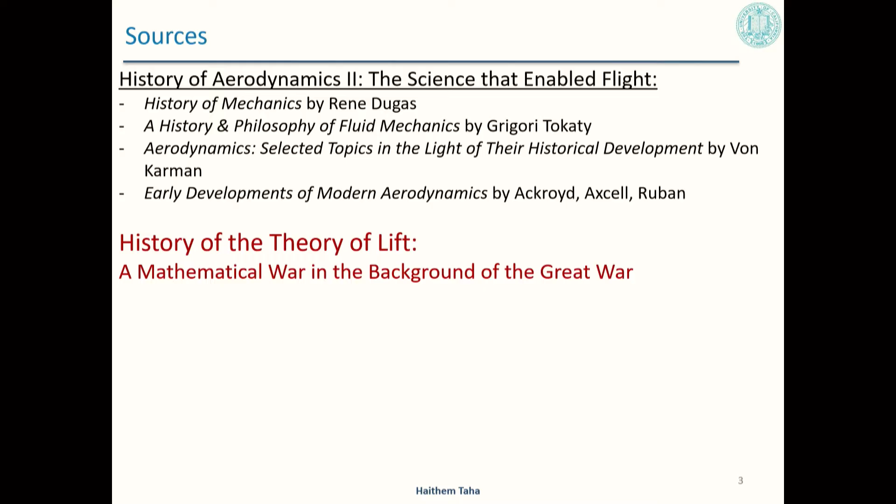So in this lecture in particular, I will mainly focus on the narrative by David Bloor in his masterpiece, The Enigma of the Aerofoil. It's the most encyclopedic book on the subject.

In fact, we aeronautical engineers are very lucky that David Bloor has decided to write on this subject, which is near and dear to the heart of every aeronautical engineer. It's a 550 pages book that tells a very rich story on the history of the subject from the eyes of a sociologist who relates the evolution of the theory to the underlying incidents in World War I politics and press.

I studied this book in detail and I summarized it in a 90 pages document, and these two lectures will provide summary of the summary. So it's far from being complete. I apologize from the beginning that many interesting and important stories will have to be neglected.

So let's start. This is the beginning. December 17, 1903, Wright brothers made the record of the first powered flight. But unfortunately, at the time, there was no guiding principles, no mathematical theory that can answer even simple questions in aeronautics, like how much lift a wing can generate, for example.

The Wright brothers had to rely on their amazing engineering skill, engineering ingenuity, and tons of wind tunnel tests, so to come up with a successful model and make history.

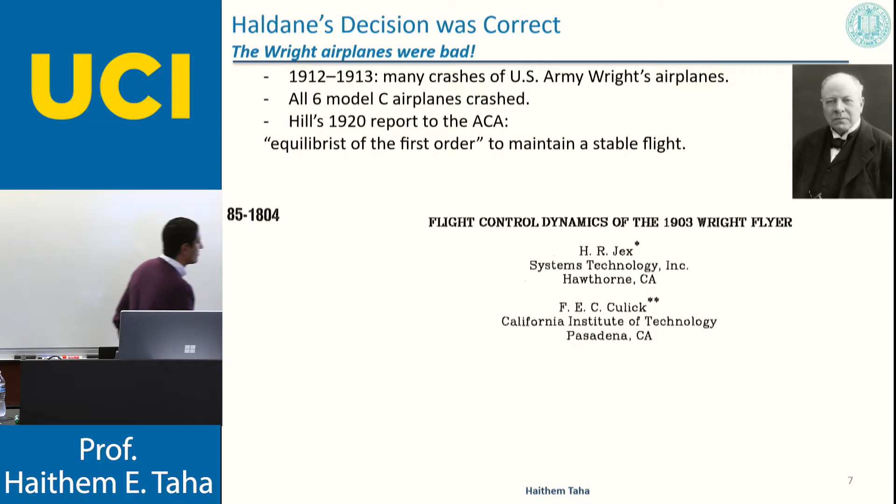Later on, when the aeronautical community learned the concept of flying qualities, the effectiveness of an airplane to perform its mission, now we can look back and assess the flying qualities of the Wright airplanes, which was already done in a 1985 paper by Jex and Culick, and they concluded that the airplane has very poor flying qualities. So Haldane's decision was not too bad, because the Wright airplanes wouldn't have been very useful to the Royal Air Force anyway.

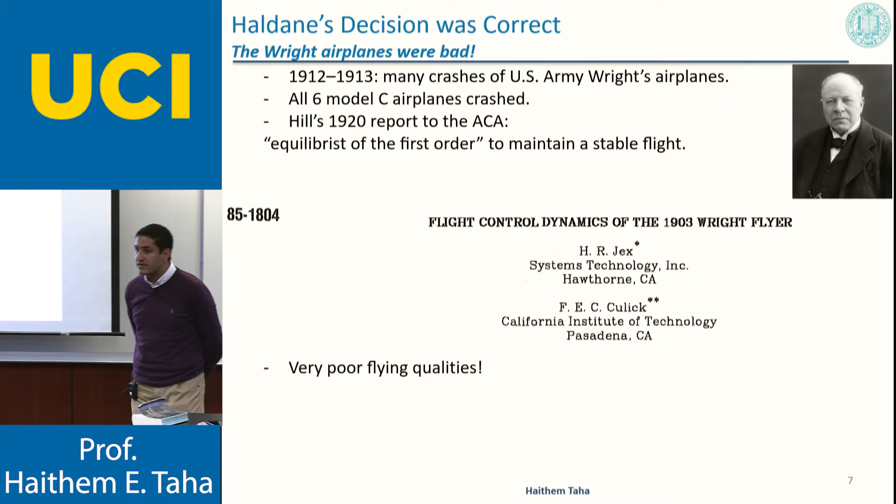All right, now let's do some digression, because the composition of the ACA, the Advisory Committee for Aeronautics, were mostly from Cambridge folks. So let's do a little bit of digression here to talk about the Cambridge Mathematics Tripos exam.

It was a very important exam for people at Cambridge, based on which many fellowships and prizes were decided. So they used to rank students. Top students were called wranglers, like senior wrangler, second wrangler, and so on. The order was published in the Times magazine. You can see this was something - the senior wrangler used to receive celebrity-like treatment.

The exam was quite competitive, as you can imagine. And actually, some professors used to include in the exams some of their research problems as exam problems. In fact, in the year 1854, one of the problems was to prove what we know now as Stokes' theorem.

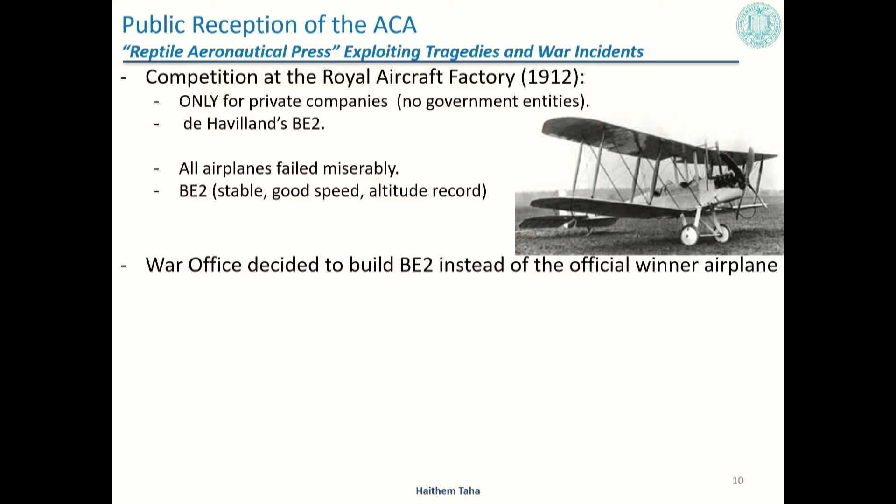Unsurprisingly, the War Office decided to build the BE-2 instead of the official winning airplane. This infuriated private firms and political opposition. And around that time, during the early days of aviation, the accident rate was high. The BE-2 had its own share. So the political opposition and the associated newspapers exploited every accident, every tragedy of the BE-2 to point to the inferior design of the BE-2 and the incompetence of government entities in general compared to the private sector. So, for example, the aeroplane came with a headline, March 19, 1914, The Victims of Science. They literally wrote that it was the scientific approach to airplane design that had killed these unfortunate men.

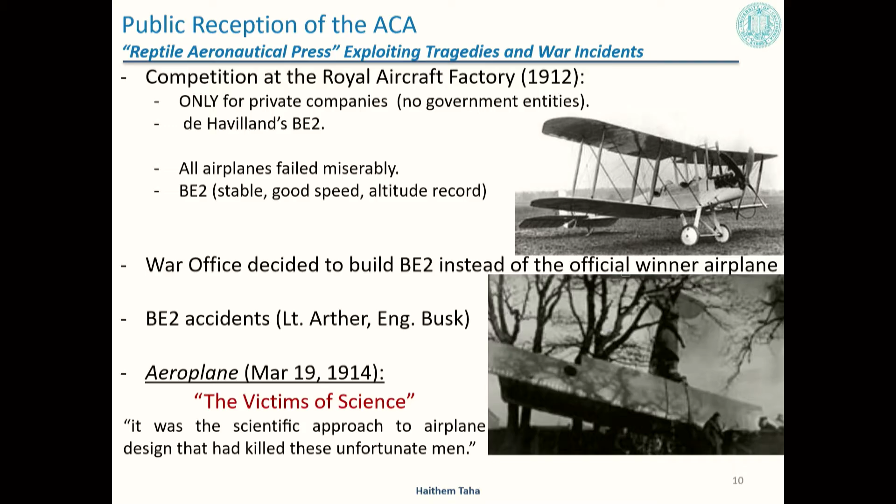So it reminds me of the recent movie, Don't Look Up.

Fits nicely. So the situation was inflamed even more in the summer of the next year - this is after the war had already started - the Fokker Scourge incident. Anthony Fokker equipped one of the German airplanes with a forward-firing machine gun synchronized to fire through the propeller. That was very nice. And the plane itself was a mono-wing, so it was more maneuverable than the BE-2 bi-wing, which was more stable but less maneuverable. This gave the Germans an advantage over the British during that summer, leading to the loss of some airplanes and people.

And this was the pretext that the opposition wanted. Pemberton Billing, he was one of the members of parliament, founder of the Supermarine Company. He was one of the supporters of the private firms in parliament. So he described the government entities as murderers inside the parliament. Due to the seriousness of these allegations, the parliament had to form two committees for investigation, one for the Royal Flying Corps and one for the Royal Aircraft Factory.

The first committee did not find violations from the Royal Flying Corps, but the second committee concluded that the rights of the private sector had been encroached upon, and they demanded governmental support for private aircraft firms. Under this extreme pressure, the government had to shut down all the design, build and fly activities at the Royal Aircraft Factory, which was a very sad decision, because before leaving, O'Gorman and his colleagues at the Royal Aircraft Factory designed and built one of the best airplanes of the time, the SE-5.

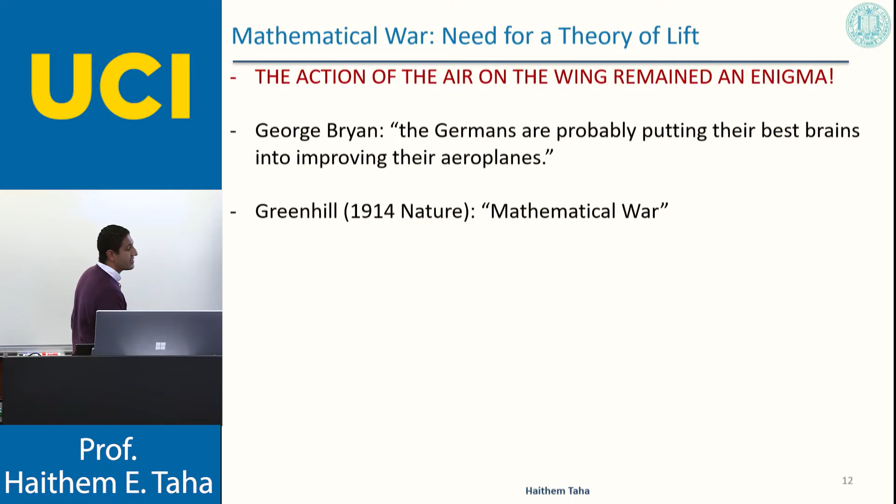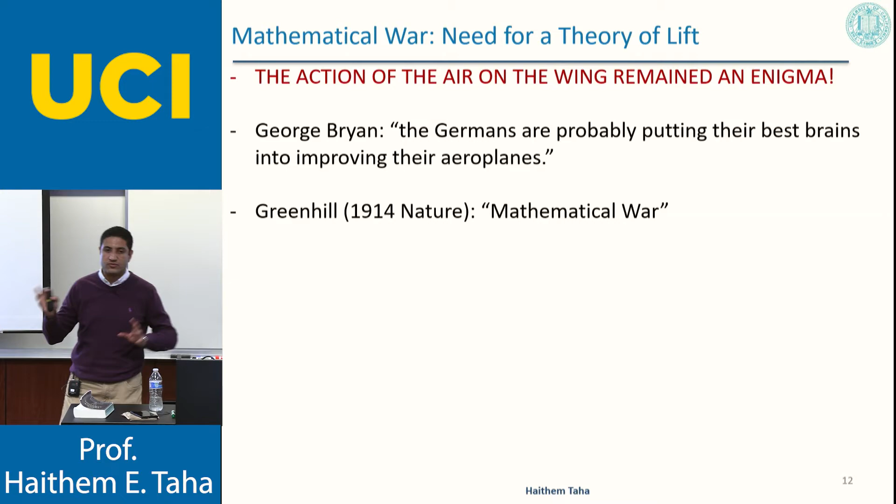With all that, the action of the air on the wing remained an enigma. In the words of George Bryan, the founder of stability theory, the Germans were probably putting their best brains into improving their aeroplanes. As Greenhill portrayed it in his 1914 Nature paper, it's a mathematical war. Basically, right before and during World War I, there was a parallel mathematical war between Germany and England to develop two theories, one for stability and one for lift.

This lecture is focused more on the lift—not more actually, wholly on the lift. And you can ask, what's going on? Why is it a big deal? This is already the 20th century, and it's a classical problem in physics. It's not relativity, it's not quantum mechanics. We know the equations of motion, force equals mass times acceleration.

What is the issue? Yes, we know the equation of motion, but in order to apply it, you need a model. Even Newton himself adopted different models for the air. In one model, he considered air particles as interacting with each other. In another, as composed of an infinite number of particles not interacting with each other. In one of his models, he considered the air composed of an infinite number of particles moving in straight lines until they strike an object. Once they do that, they lose their momentum normal to the object, resulting in a normal force. This leads to the famous sine-square law.

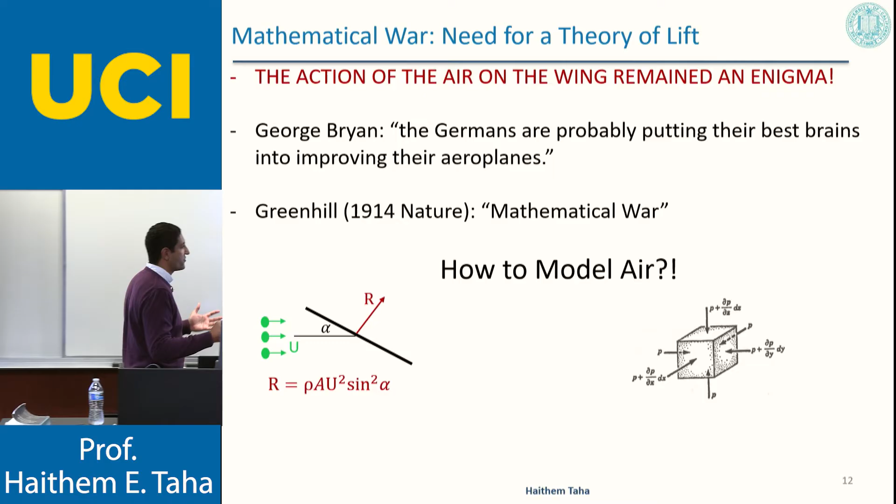Well before this time, physicists and fluid mechanicians realized that this is not the right model for air, and a better model would be through what we call the fluid element, which allowed us to use differential calculus in conjunction with the equations of motion to come up with a good model for the fluid continuum.

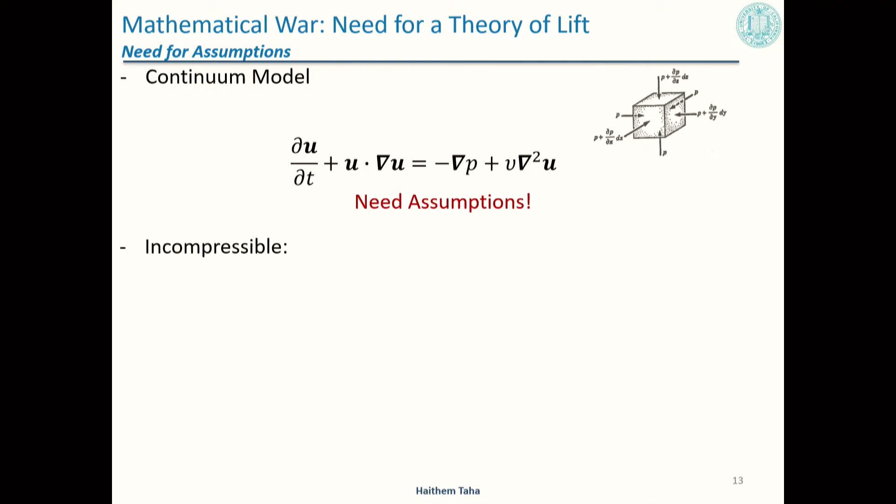Now the equations of motion are the Navier-Stokes equations. Yes, but we need assumptions—we cannot brute force solve Navier-Stokes equations at the time. So we need assumptions. The best assumptions at the time were: although really air is compressible, at the time flight was occurring at small speeds, like 70 miles an hour. In fact, up to 200 miles an hour, the error in density due to this incompressibility assumption is within 3%, which is very reasonable.

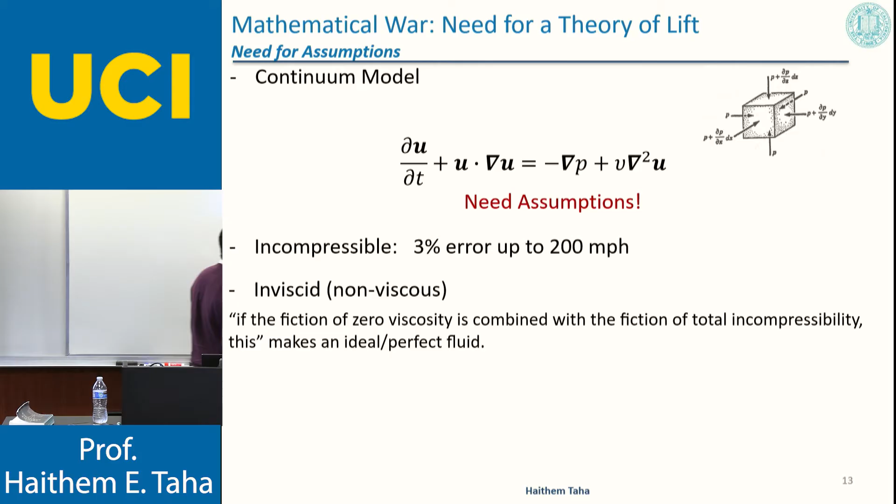Also, air has very small viscosity, and the thought at the time was a theory for zero viscosity fluid would be good enough for a fluid with small viscosity. David Bloor expressively stated it: if you add the fiction of zero viscosity combined with the fiction of total incompressibility, this makes an ideal fluid. It's a fictitious concept, all right? And if you accept these two assumptions, you get the Euler's equation for an ideal fluid.

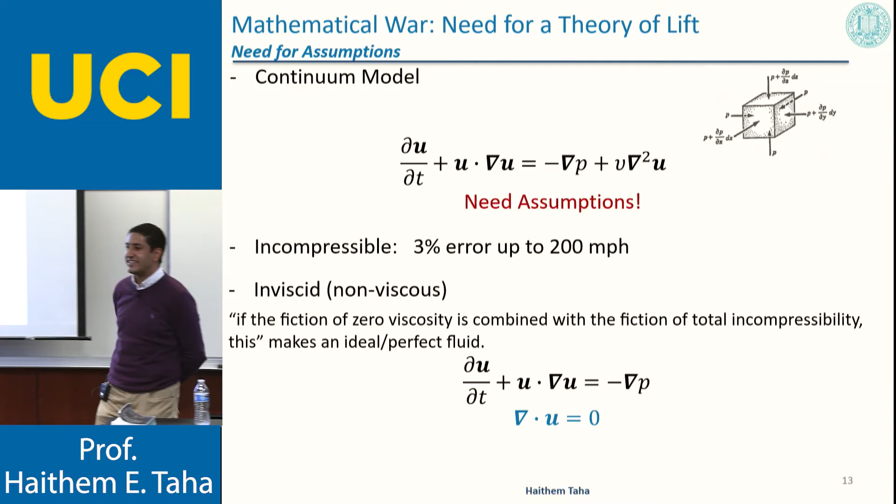And even with this whole set of assumptions, it's not enough. We cannot obtain a theoretical or analytical solution for the Euler equation even today. So we need more assumptions, and hopefully they should be brilliant in the sense that they're reasonably accurate and also enable us to do something we could not do otherwise.

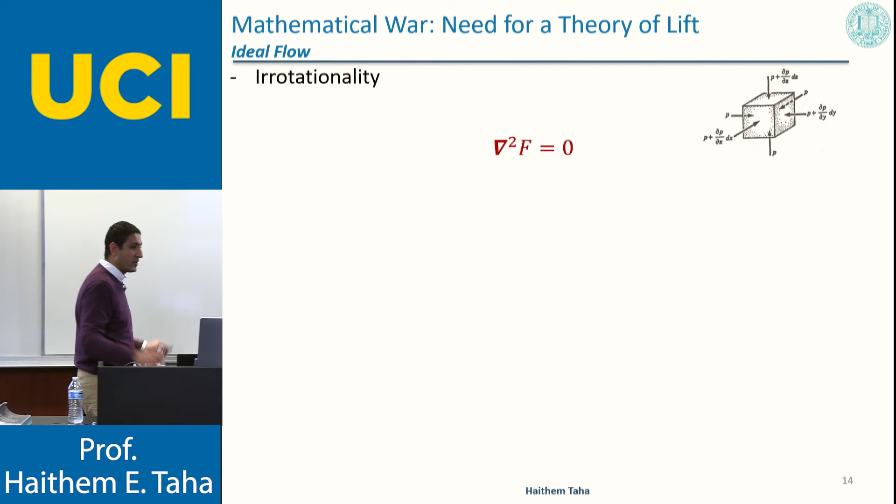That was the irrotationality assumption, which simply assumes that fluid elements, while moving, do not rotate around themselves. If you accept this assumption, then Euler's equation reduces to the Laplace equation, which is a very happy coincidence. Why? Because this set of equations appears ubiquitously in physics—in gravitation, heat, elasticity, electromagnetism, electricity, you name it. So we have a huge legacy to exploit.

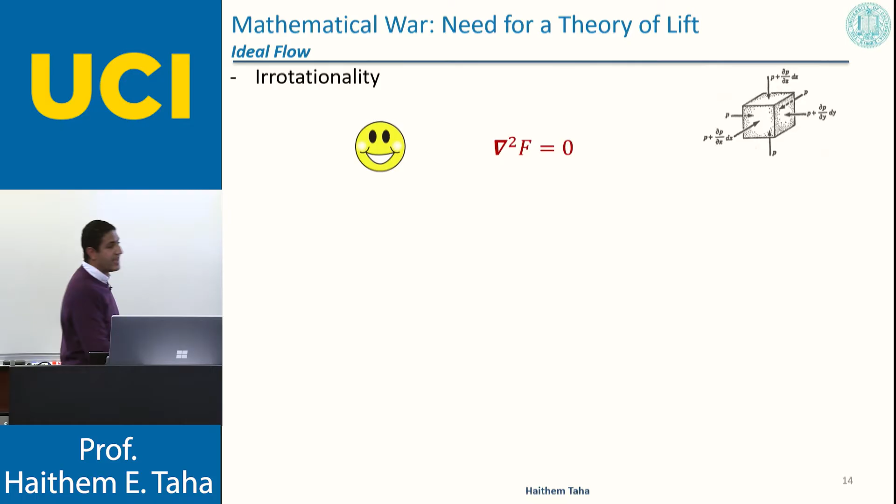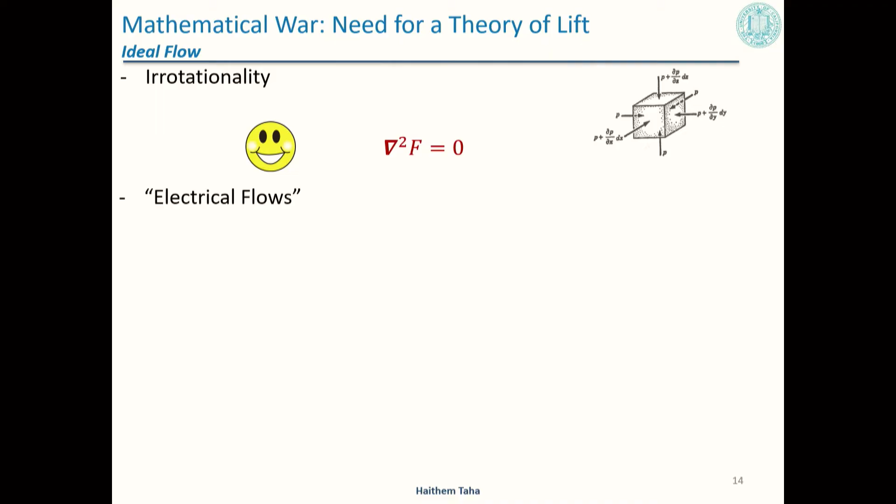In fact, Maxwell himself exploited the analogy between hydrodynamics and electricity to solve the flow through an orifice. This is why these potential flows are sometimes called electrical flows. So now we know how to solve this equation—we have a huge legacy from all other branches. Let me give you one way of solving these equations, which is quite interesting. A function f that satisfies this equation is a differentiable function. A differentiable function in the complex domain, we call holomorphic.

A function f that satisfies this equation represents a flow field over some body. This means that any holomorphic, differentiable function represents the flow over some body. Give me any differentiable function, it immediately represents some flow field, which means we can construct flow fields in the blink of an eye.

So let's try together. What is the simplest differentiable function of non-zero derivative? Well, it's f of z equals z. This represents a free stream. Not so exciting. What about another suggestion?

Well, what about 1 over z? This represents a doublet, which is the hydrodynamical analog of an electrical dipole. Again, another fictitious thing. What about the addition of the two? Well, it represents the flow over a circle, which is a very realistic thing. So now we're talking, right?

Now we're very happy, because now we have the flow field in the entire domain: velocity at every point, pressure at every point. In particular, over the surface, we can integrate and get the force.

And here is another happy coincidence. There is the Riemann mapping theorem, which implies that give me any nice shape in the domain, I can always convert it into a circle. So now I can solve the flow field over any shape. I will convert it into a circle where I already know the flow field.

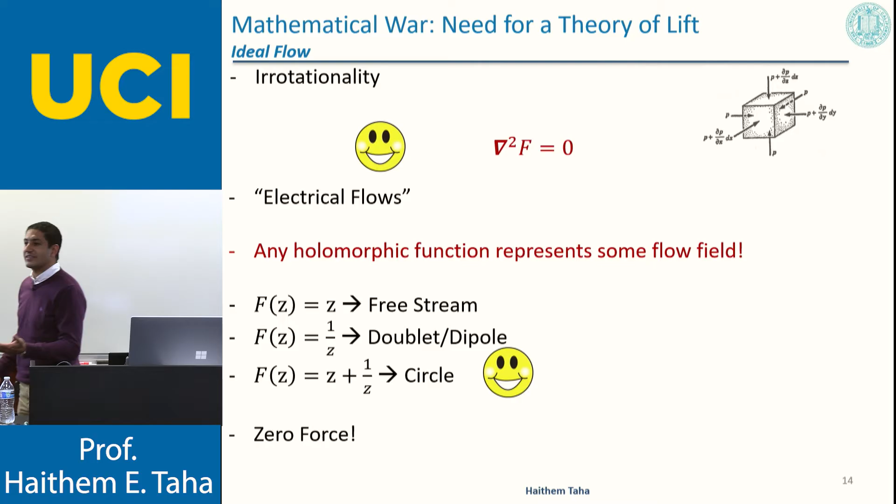We're done. And if you do that and get the force on the circle, you get a zero force. Not only on the circle, on all shapes, which is quite disappointing. So when we thought that we got it all, we got nothing. That is the D'Alembert paradox, which in Germany was called the Dirichlet paradox.

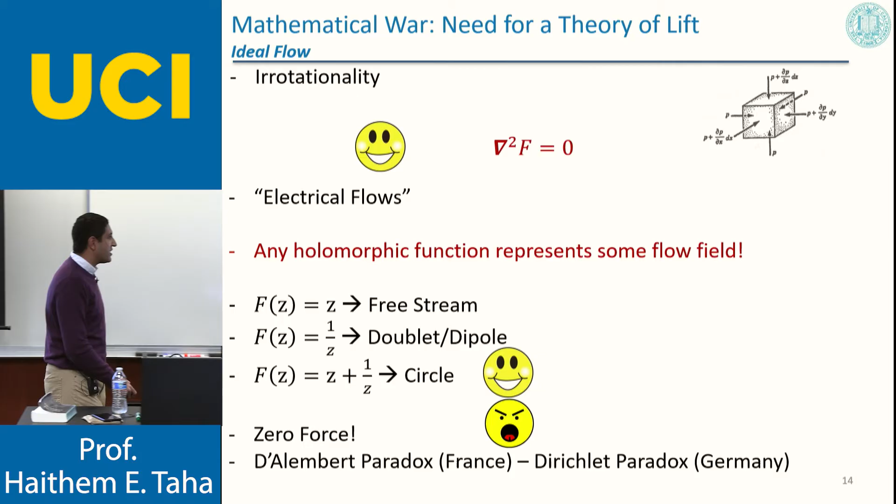So we need to relax one of these assumptions, and luckily Helmholtz and Kirchhoff realized that we can have more solutions. The zero force solution is not the only solution. So for the Laplace equation, we just need to relax the irrotationality assumption in a smart way, and we will get lift and drag and everything, from the Laplace equation.

So the issue is, here is the point: if you give me a way to relax the irrotationality assumption, this will represent a theory of lift. At the time, there were two competing theories of lift, one in England and one in Germany. Interestingly, the one in England appeared first in Germany and vice versa.

The British theory was the discontinuity theory of lift, which appeared first in Germany by Helmholtz and Kirchhoff. Helmholtz considered this extreme example: a flat plate meeting the air at a right angle. You cannot give me zero force for this. Ironically, if you solve the flow field in the classical way, you will get a zero force for this—it's agnostic to the shape and the angle of attack.

It doesn't matter. So he relaxed the pure irrotationality assumption as follows: he allowed sheets of discontinuity to emanate from the sharp trailing edge, sharp edges, both edges. And he modeled the air behind the plate as dead air, stagnant. This already breaks the symmetry between the flow in front of the plate and behind the plate, so it will cause force, for sure. All right, so that's Helmholtz.

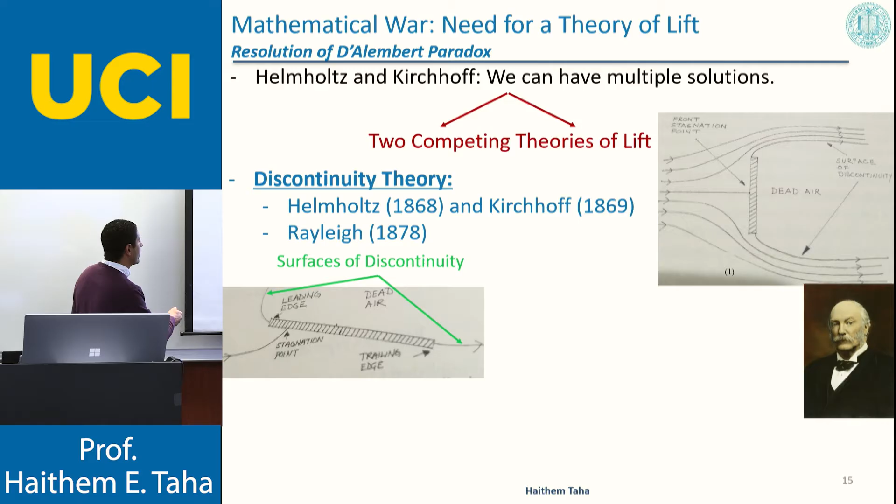Then later on, Rayleigh used the same line of thought, the same theory in England now, to solve the flow over a flat plate at a smaller angle of attack, more representative of flight. He used the same theory in the sense of sheets of discontinuity emanating from the sharp edges, dead air on top of the plate. This will cause a normal force on the plate, and here is a nice expression for the normal force, from which you can compose lift and drag.

Let's look at the lift coefficient variation with the angle of attack. This is interesting. The red curve here is the Newtonian theory, sine square law. Blue is Rayleigh's theory. Black is the classical theory that we currently teach everywhere in our aeronautical engineering schools, which is close enough to reality.

As you can see, both the Newtonian theory and Rayleigh's theory underestimate lift significantly. So nature is much more generous than what Rayleigh and Newton had thought about lift. In fact, some people even blame Newton for the delay of aviation, because if this formula by Newton were to be correct, aviation wouldn't be possible.

Some people blame Newton because the very small lift and large drag associated with his model might have discouraged some people from pursuing aviation.

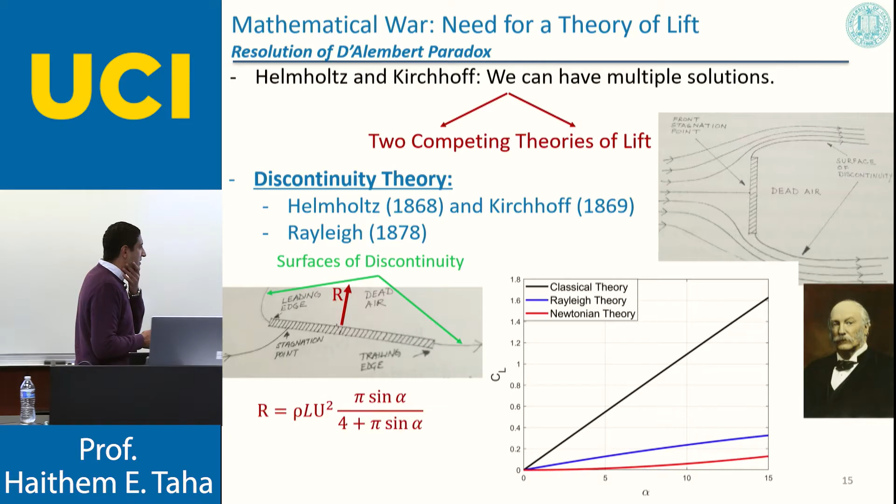But anyway, at the beginning, at the ACA, the Advisory Committee for Aeronautics, the main business was the discontinuity theory of lift by their president, Rayleigh. It was extended theoretically, verified or validated experimentally, tested experimentally, and so on.

As early as 1909, an experiment by Mallock compared the theory to experiments, and he found a great difference, as we already pointed out. Not only that, he found that the main lift in reality comes from the suction side, on the upper side of the airfoil, not from the pressure side. This is in contrast to what the theory was suggesting.

The theory was suggesting something like the air is pushing the flat plate or the wing like this. This is not how lift works, right?

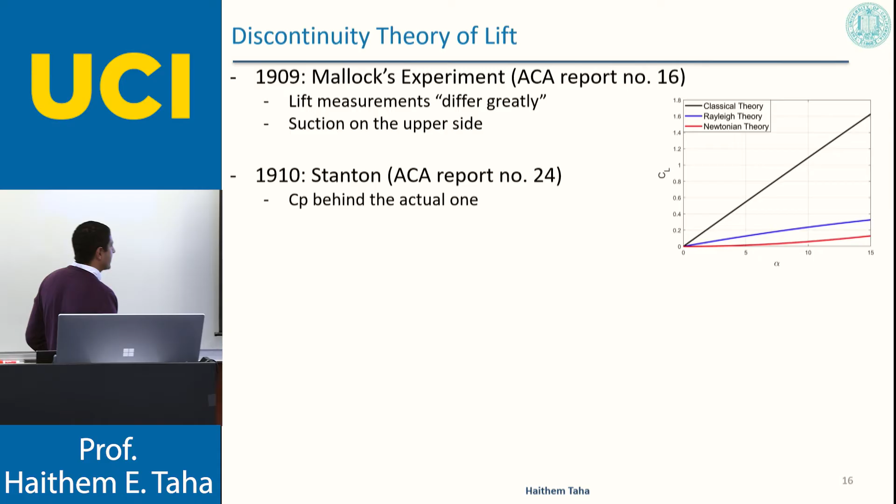A follow-up report by Stanton found that the center of pressure suggested by the theory is actually behind the actual one. Another follow-up report found a significant effect of the shape of the upper surface in controlling lift, which is completely ignored by the theory. So simply, we're talking about a wrong theory, both qualitatively and quantitatively.

And here is the bothering thing. I already showed you in the first slides the amount of political tension and military tension, and at the ACA they were formed to handle this, and they found that this theory is wrong, even though they did not stop working on it because it was mathematically interesting.

As late as 1914, Bryan and Greenhill were still publishing on the discontinuity theory of lift, which may really seem to confirm the statements by the generals that scientists should be on tap, not on top.

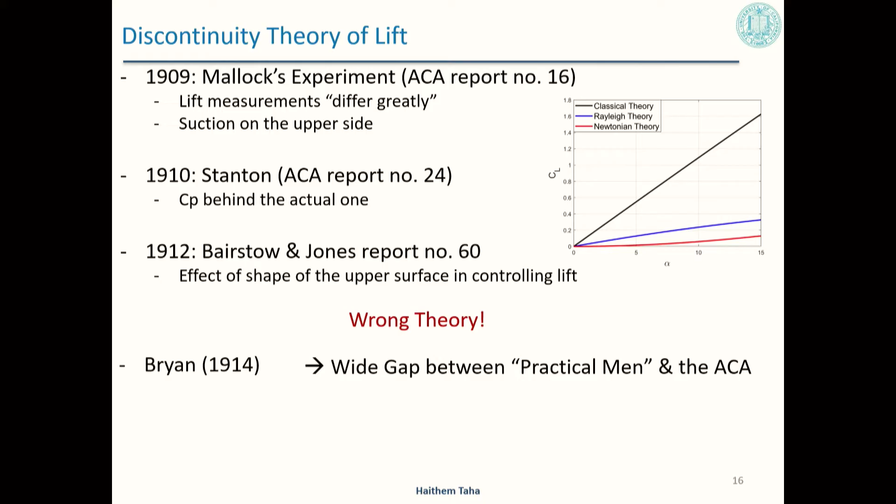This obviously widened the gap between practical men and the advisory committee, because if you're not providing something useful, the practical men will find their own way. They will do it their own way.

You can see the Aeronautics Journal actually writing: ask Eiffel for the air resistance of, say, an airship hull, and the job is done in a couple of days, while it would last heaven knows how many weeks at the NPL. This led to the emergence of what Bryan had called neo-Newtonians.

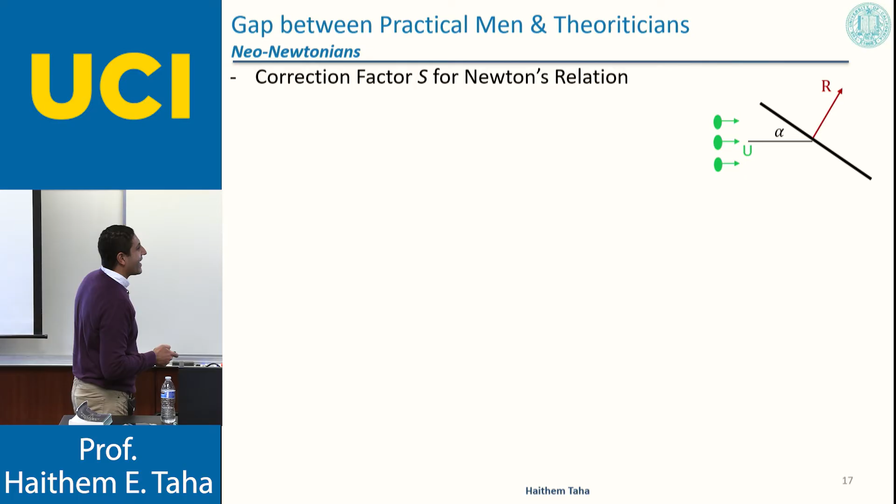People like Newton's model, so it's simple, sine square law, the angle of attack. It underpredicts the resultant aerodynamic force. Well, we're going to add a correction factor S. So they called them neo-Newtonians. That was basically an empirical equation that fits the data.

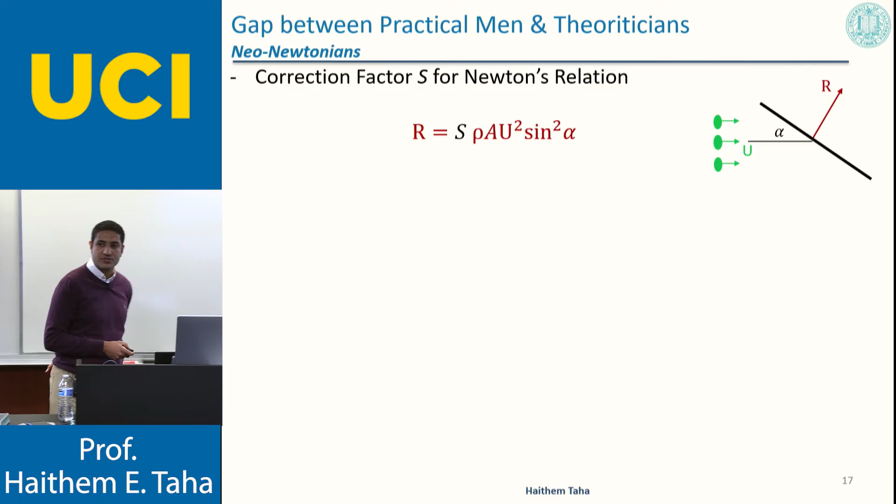So that was the state of knowledge in England right before the war, as stated by David Bloor: on the eve of the Great War, none of the British workers in the field of aerodynamics had any workable account of how an airplane could get off the ground.

And as you can imagine, the war will have its own demands. It will not allow fundamental studies. So the British aerodynamicists did not come off the war better than before it.

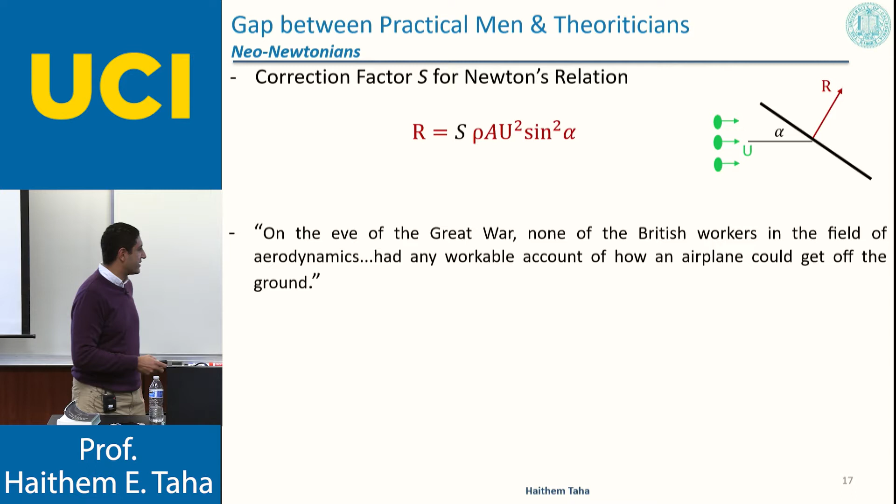You can see here George Thomson, the son of the Nobel laureate J.J. Thomson, wrote a book on applied aerodynamics as late as 1919, after the war. He wrote: in spite of the enormous amount of work which has been done in aerodynamics and the allied science of hydrodynamics, there is no satisfactory mathematical theory by which the forces on even the simplest bodies can be calculated with accuracy.

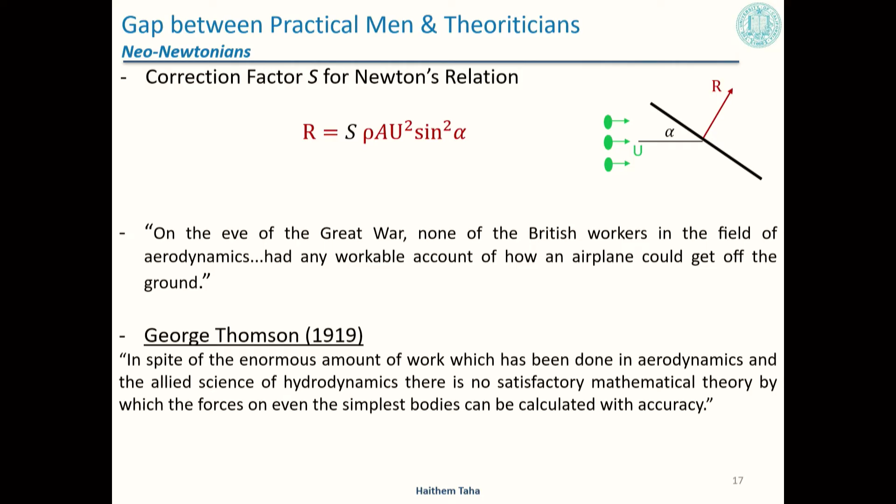Interestingly, the British had an alternative theory that they consciously decided to ignore: Lanchester's circulation theory of lift, or cyclic theory of lift.

Lanchester was a practical engineer. He was very skillful in building engines and cars. He actually founded a company for this. And he was one of the two practical members on the committee, so obviously he was an outsider to the elite group from Cambridge.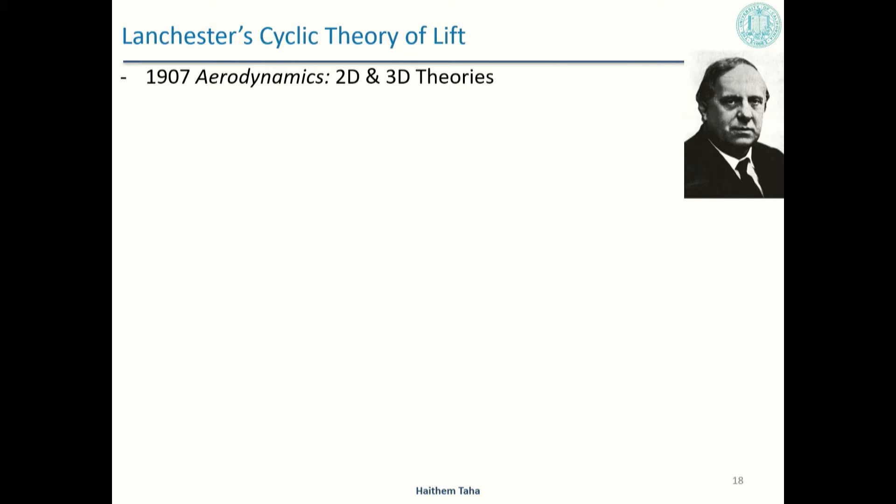He had a serious interest in aerodynamics. In 1907, he published a treatise in 2 volumes. This is the first volume in aerodynamics, where he developed both 2D and 3D theories. Actually, he's the only one to work on the 2 versions of the theory. Kutta did 2D and didn't do 3D. Prandtl did 3D but not 2D. He's the only one to work in both.

So his simple idea for the 2D was that the 2D lift is actually due to a combination of a circulation and uniform flow. So somehow, as the wing moves through the air, it creates a circulatory flow, a circulation. But this circulation is not like a real vortex that we see in water where it moves with the flow. This is stationary to the wing, so he used the name bound to the wing. So this is why we call it now bound vortex. And if you accept this theoretical description, then the lift can be determined from the famous relation rho-u-gamma.

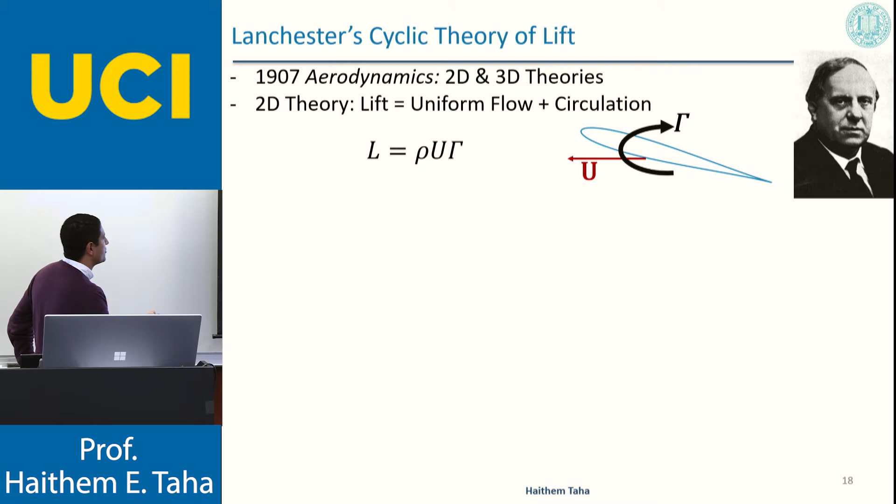The fact that the combination of a circulation and uniform flow generates lift was not new. Actually, 30 years before, Rayleigh used the same idea to analyze this fancy problem of why a tennis ball swerves upon a cut. Interestingly, David Bloor was telling the story that Rayleigh was concerned with what they called real tennis or royal tennis. It's not our actual tennis.

This used to be played indoors, and players were allowed to use walls. Anyway, he was saying that it had a very difficult set of rules, to the extent that it may take a couple of years for you to learn it, and you cannot write it in a document. You have to learn it in person. So David Bloor commented, clearly this was a game for wranglers.

So Rayleigh was interested in analyzing this fancy problem, and he made an ideal model for it, which is the model of a rotating cylinder, an ideal model for a rotating tennis ball. So as we all know now, Rayleigh hypothesized that the rotation of the cylinder induces a circulation, and once you have a circulation, he can get lift from this exact same formula, and probably this was the first time where one form of this formula was written.

However, he actually wrote that friction is the immediate cause of the whirlpool motion, which is quite interesting. Remember, this is a very different lifting mechanism than just an airfoil moving through the air. But it's very different but similar at the same time, because we're saying here lift is due to circulation, and here lift is due to circulation. They are using the exact same relation.

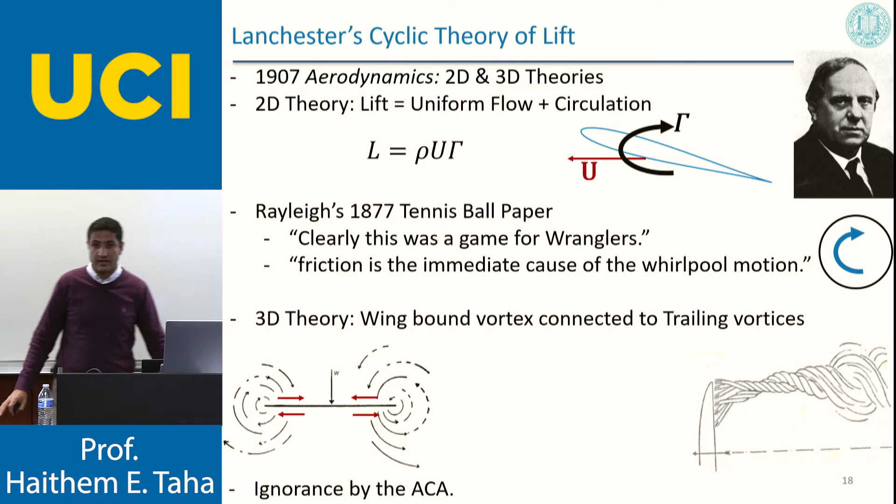So he wrote that Glazebrook, the chair of the committee, always treated me as if I was appointed purely for my knowledge of the internal combustion engine. He didn't consider any knowledge in aerodynamics, you know. In fact, Bairstow used to laugh at him and mock him, just telling him bluntly, we don't believe in your theories, period.

In fact, Lanchester sent 6 copies of his treatise on aerodynamics to 6 members of the committee. Only Rayleigh responded positively, with copies of his papers. Another member acknowledged the receipt, and the other 4 did not even respond, which is quite rude.

In searching for an explanation of the forces which act on solids moving through fluids, it is useless to confine one's attention to irrotational motion. He's basically saying if you start from rest, the flow is irrotational, it will remain irrotational. You will lose the capability of generating force.

And this was the prevalent mindset in the community at the time, and I would say even until today. But

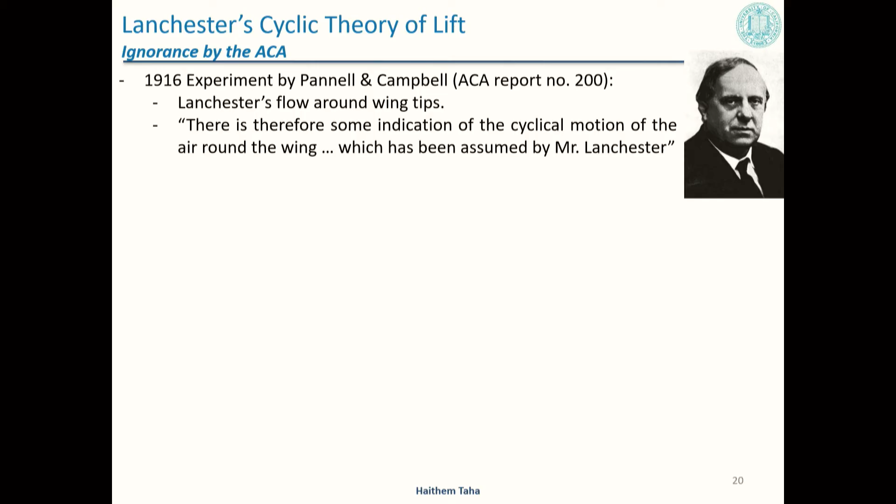There was an experiment in 1916 by Pannell and Campbell at the committee. They were doing something with horns and flaps and stuff, and they found actually evidence for Lanchester's work. They wrote, there is therefore some indication of the cyclical motion of the air round the wing, which has been assumed by Mr. Lanchester, which should have been a motivation for them to further pursue investigation of the theory, even though they completely ignored it, completely ignored the evidence.

In these paragraphs they wrote, it can be shown that this force, the lift, is proportional to the intensity of the cyclic motion, gamma, and is thus apparently quite arbitrary. Fine, we agree with you. Ideal flow works. Lift is rho u gamma. How much is gamma? I mean, your ideal flow dynamics can't say anything about gamma.

So, in fact, they wrote a letter for him asking about the physical conditions that determine the cyclic constant. We know that this is a very hard question, so it remained open for so long. And he replied something like, okay, let's collaborate. So this was their conclusion from that chapter.

The failure of the various treatments of the problem is evidently due to the supposition that the fluid is perfect. We need a viscous theory that will clarify at one stroke the whole problem of aerodynamics. And we are 100 years after that, and we still don't have this viscous theory.

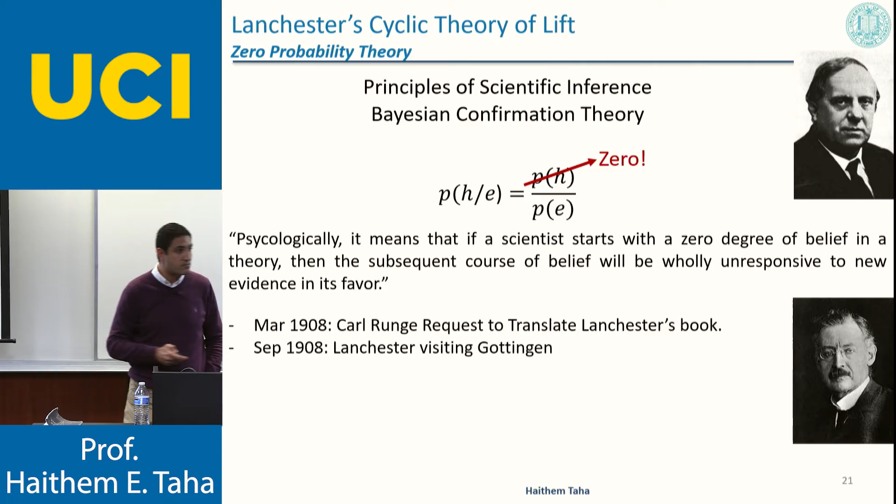And unlike this response by the British, the German response to Lanchester was very different. In fact, in March 1908, Runge sent a letter to Lanchester requesting to translate his book into German. And in September of the same year, Lanchester actually visited Germany, Gottingen in particular, and was hosted by Runge and his wife. So the question is, why did the British abandon Lanchester's theory and the Germans adopt it?

That's the question. It actually boils down to a difference between physicists and engineers. This is from Lanchester's words himself: with the exception of Lord Rayleigh, the NPL did not take my work seriously. I believe because my methods did not appeal to them in view of their training. They mostly belonged to the Cambridge School, whereas I was a product of the Royal College of Science.

So let me tell you some differences between their perspectives of the two schools. For example, on D'Alembert's paradox, how they view it differently.

So to the British, there's nothing paradoxical about it. Why? You invented a fictitious concept called ideal flow, so it's not surprising that it results in zero force. If this thing ever exists in life, it will behave this way, giving you zero resistance.

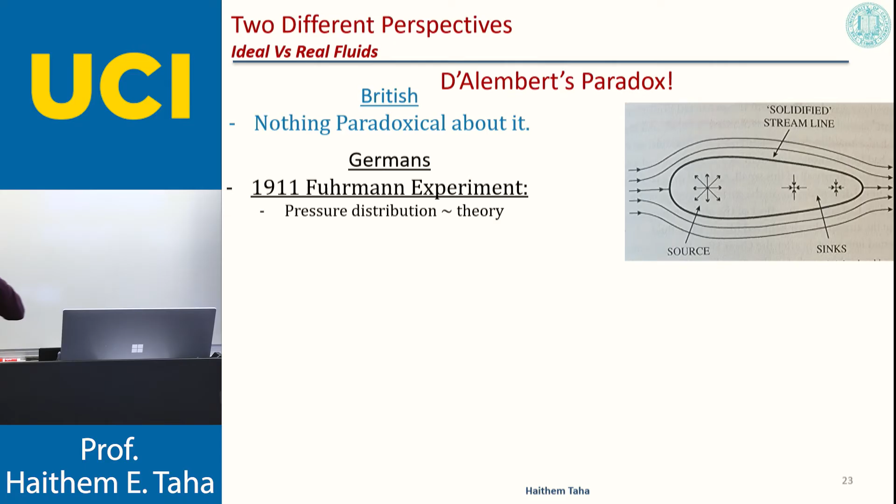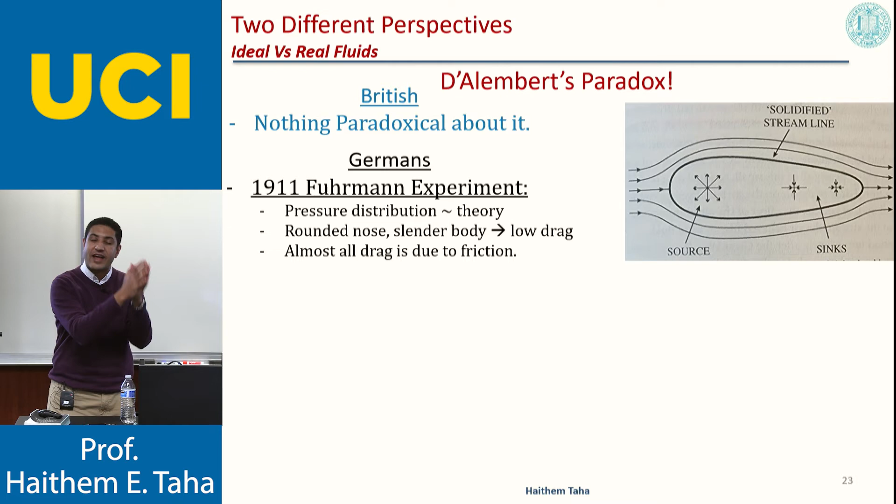We know a priori that the theory will result in zero net force for all these shapes, but he was interested in comparing the pressure distribution on the surface. He actually found good matching between the two sets of data, the measured and the theory. Not only that, he found that for rounded nose, slender body shapes with small thickness, those relevant to aeronautics, the resulting drag is quite small from experiment. And this drag is mostly due to friction, meaning that if we ignore friction, the rest of the drag is almost zero.

So look at how Prandtl interpreted this result: the theoretical theorem that in the ideal fluid the resistance is zero receives in this a brilliant confirmation by experiment. And this is a stimulus to seek further relations between theoretical hydrodynamics and practical aeronautics.

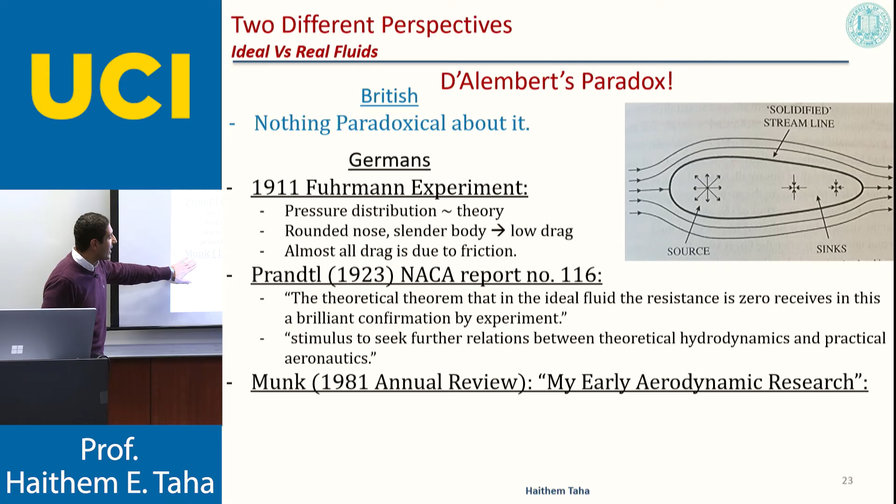Look at the paper by Munk, one of Prandtl's best students, in the 1981 Annual Review of Fluid Mechanics, looking 80 years back on his career in aerodynamics with Prandtl. The wind tunnel was asked whether the study of the motion of a perfect fluid was helpful for practical aerodynamics, and the wind tunnel answered with a loud yes. This was a very great achievement of Prandtl, one for which he did not get enough credit.

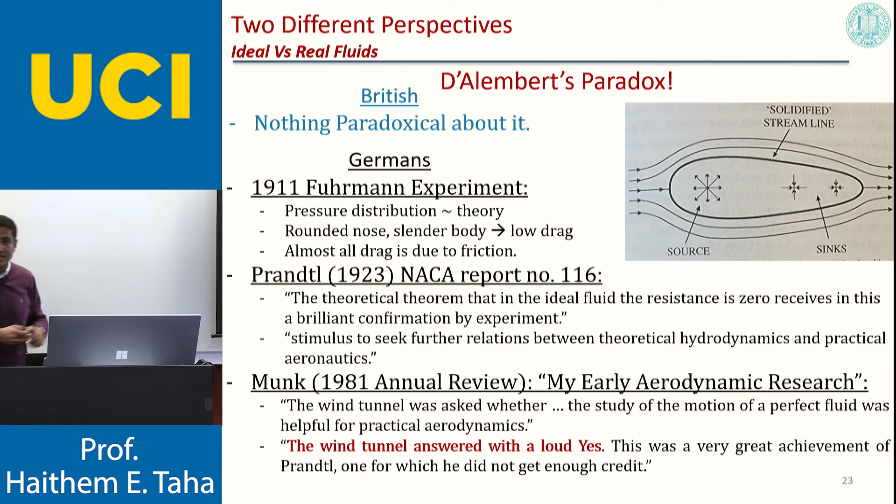So you can see the difference in mindset. The British viewed ideal fluids as fictitious; the zero force result is something natural for this fictitious concept. The Germans viewed the zero force result as a reasonable approximation for what is really happening in reality, for shapes relevant to practical aeronautics.

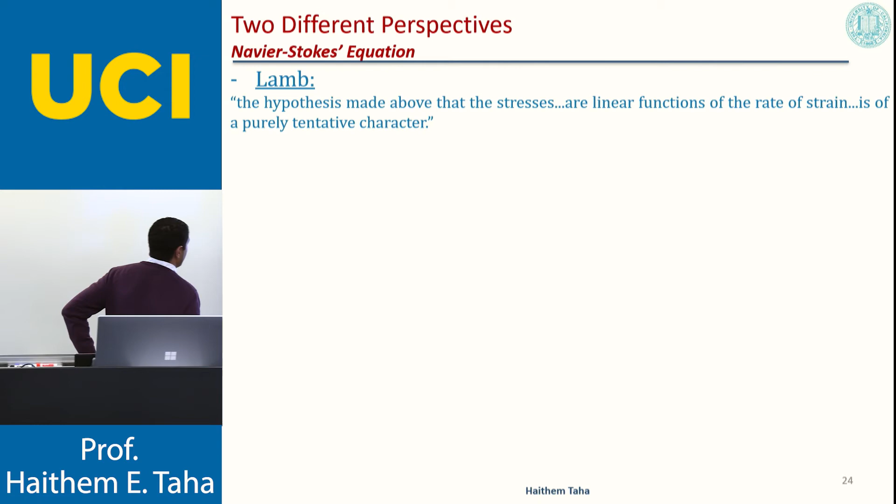Let's look at another difference: their views on the Navier-Stokes equations. These things are controversial. Lamb wrote, you can open your Lamb book and find this: the hypothesis made above that the stresses are linear functions of the rate of strain is of a purely tentative character, meaning it has no basis, it's just a mere assumption. And he followed: we have so far no assurance that it will hold generally.

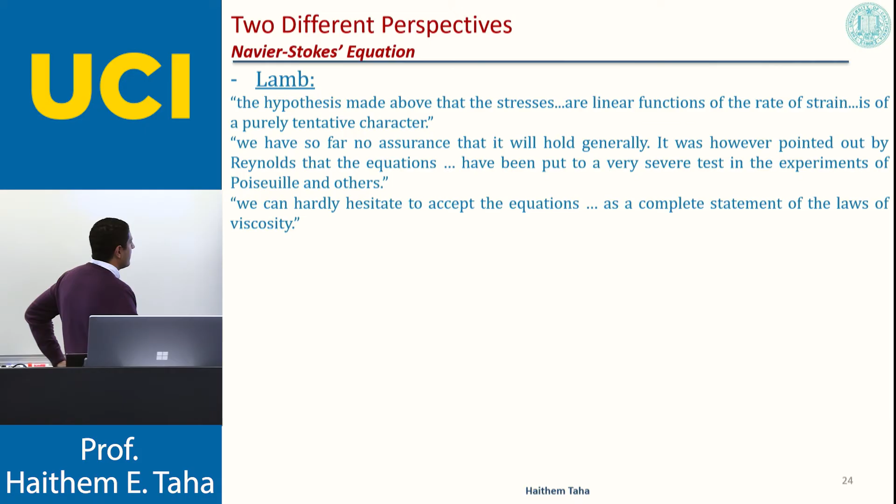It was, however, pointed out by Reynolds that the equations have been put to a very severe test in the experiments of Poiseuille and others, so we can hardly hesitate to accept the equations as a complete statement of the laws of viscosity. This is a very big statement. David Bloor commented there is an immense authority behind this judgment; he's simply stamping the theory with the stamp of truth, saying this is the complete statement of the laws of viscosity.

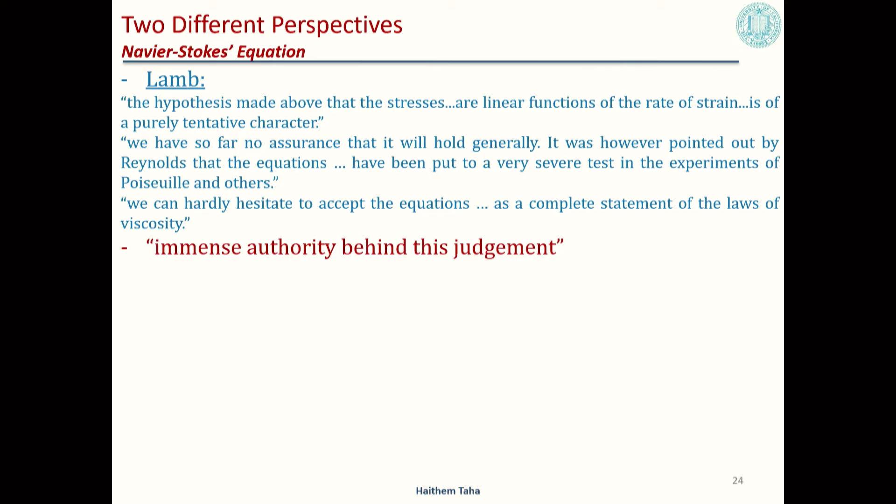I don't know how he can write that, because at that time the experiments he was relying on were for laminar flow. So fine, Navier-Stokes is valid for laminar flow, but how can I be sure at that time that it will govern turbulent flow at high Reynolds number? At that time there was no guarantee at all. In fact, we could not find an analytical solution for turbulent flow, and even nowadays, it wasn't until relatively recently that we managed to solve Navier-Stokes equations for turbulent flow via DNS.

Perhaps one of the first papers, if not the first, was by Spalart in 1988, at a relatively high Reynolds number, compared with experiment and showing good matching. So how can I be 100% sure, before these results, that Navier-Stokes equations will capture the turbulent flow field? This was certainly a very early claim of victory by Lamb, and this was the British attitude. This is von Mises' hydraulic hypothesis: he's saying that the flow around an airfoil is doubtless a turbulent flow of a viscous fluid, of course.

But if the small oscillations are disregarded, the remaining steady velocity values agree very well with those computed from the theory of perfect fluids. The viscosity is responsible for the continual fluctuations or for the turbulent character of the motion.

This is his hypothesis, it's an assumption. Look at the next statement, which now we can really laugh at: it is left undecided whether the instantaneous fluctuating velocities of the real fluid follow the Navier-Stokes equations or not.

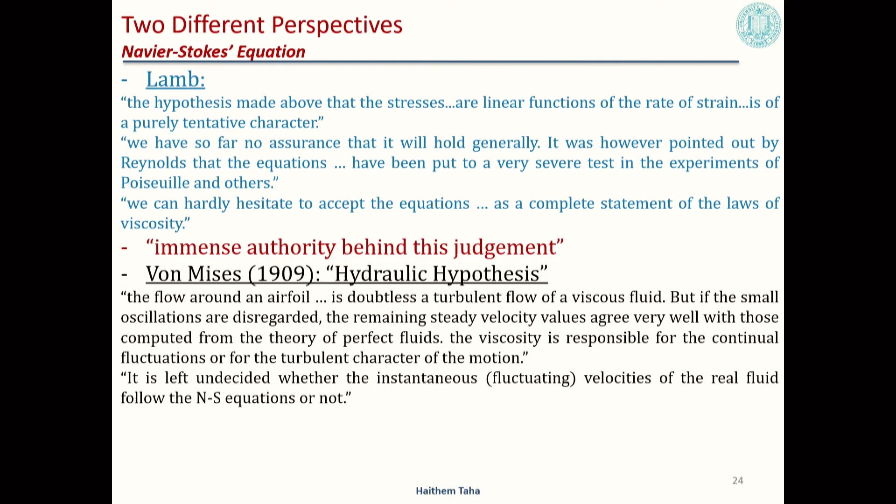He's basically saying that the average flow field at high Reynolds number will follow the ideal fluid dynamics, and we do not know whether the fluctuating field, the turbulent field, will follow Navier-Stokes equation. It's like we're sure of the ideal flow concept, we're not sure of the Navier-Stokes equation capturing the turbulent flow. You have to put yourself in their shoes at the time - this is the knowledge that they knew at the time.

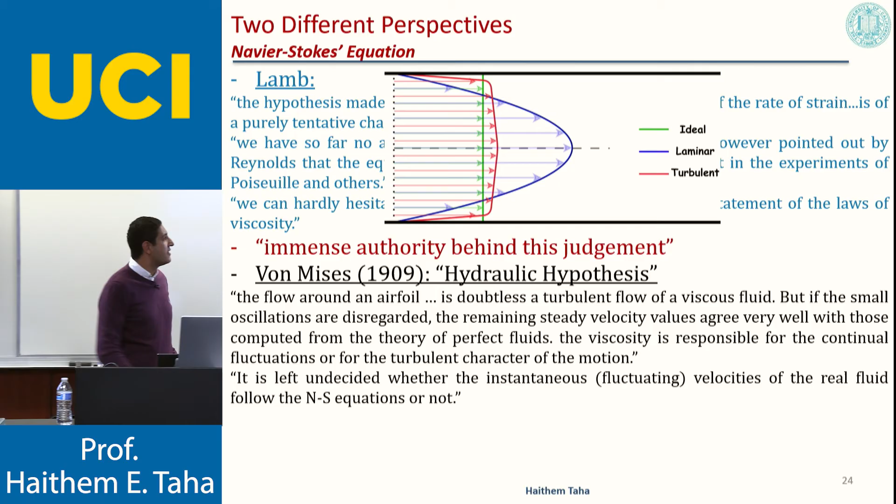Thanks to Abdurrahman for making this figure. So this is what they knew at the time. Let's say flow in a pipe: the blue is the laminar flow from Navier-Stokes - this is the only solution they could get from the Navier-Stokes equation at the time. Green is the naive solution from the ideal flow, unresponsive to the tangential walls. Red is the turbulent, which is closer to the actual turbulent flow. So you have to put yourself in their shoes at the time.

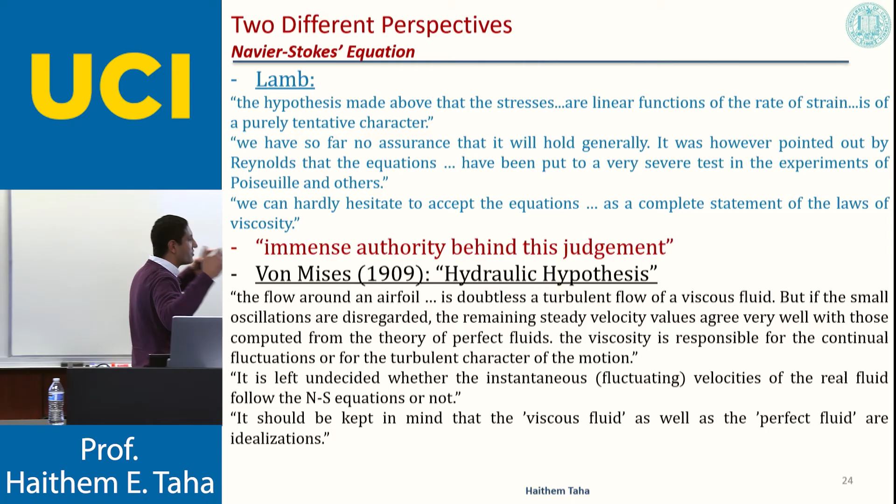So anyway, he concluded that it should be kept in mind that the viscous fluid, as well as the perfect fluid, are idealizations. This is important, because sometimes we really take things for granted and forget that Navier-Stokes is an idealization. So yes, of course it should result in better results, but still it's an idealization.

It wasn't only the Germans, by the way, who viewed this. Here is an American mathematician, famous American mathematician, Truesdell, as late as 1955, writing: I could not accept the so-called derivation of the Navier-Stokes equations given in the textbooks. It seemed as unreasonable to suppose viscous stress a linear function of rate of deformation, as to replace every curve by a straight line.

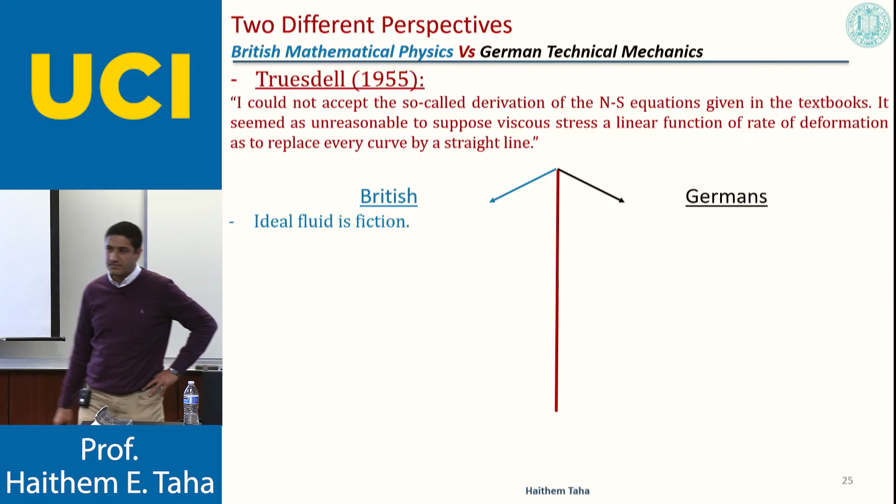So anyway, in summary, let me summarize the difference in views between the British and Germans. British viewed ideal fluid as fictitious. In the words of Melville Jones, one of the later professors in aeronautics at Cambridge, he said it was regarded purely as an exercise for the amusement of students - material for examination boards like our prelim, but not for serious research.

The Germans, on the other hand, viewed ideal fluid as a good approximation, reasonable approximation of the average flow at high Reynolds number. That's a very different mindset between the two schools. British saw Navier-Stokes as the truth. To Germans, both are idealizations - one is better than the other, hopefully, but both are idealizations.

For British, lift is viscous, and if you really want lift, go and solve the Navier-Stokes equation - don't waste your time doing anything else. For Germans, ideal fluid theory actually provides a reasonable estimate of the lift for the cases relevant to aeronautics.

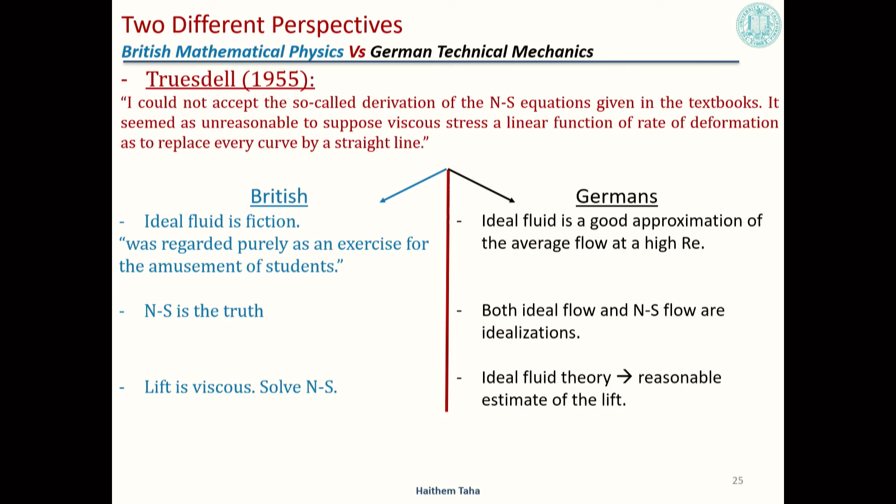I have the question here, really: we have two different schools, or two different sets of scholars. They encountered the exact same physical facts, yet they arrived at very different conclusions. So the question is, why did the Germans arrive at different conclusions than the British?

And the answer simply lies in their training in technical schools. For Europe at the time, for an educational institute to get the name of a university and status of a university, it must include some subjects like medicine, law, philosophy, theology. After the Industrial Revolution, there was a high need for engineering-focused schools, which resulted in the Technische Hochschule, or technical schools - excuse my pronunciation for both German and English.

But anyway, this was the result of this movement. They were deprived of the status of the name university, and in fact they were not even allowed to grant doctoral degrees. It wasn't until recently, or late 1800s, after a heroic effort from Felix Klein the mathematician, that they were allowed to grant doctoral degrees. In the very next year, Prandtl got his PhD degree from TH Munich.

Kutta did his postdoc at TH Munich. Felix Klein served as chair at TH Munich. Prandtl was a chair at TH Hanover, and so on. So the educational philosophy at these THs at the time can be expressively stated by Foppl.

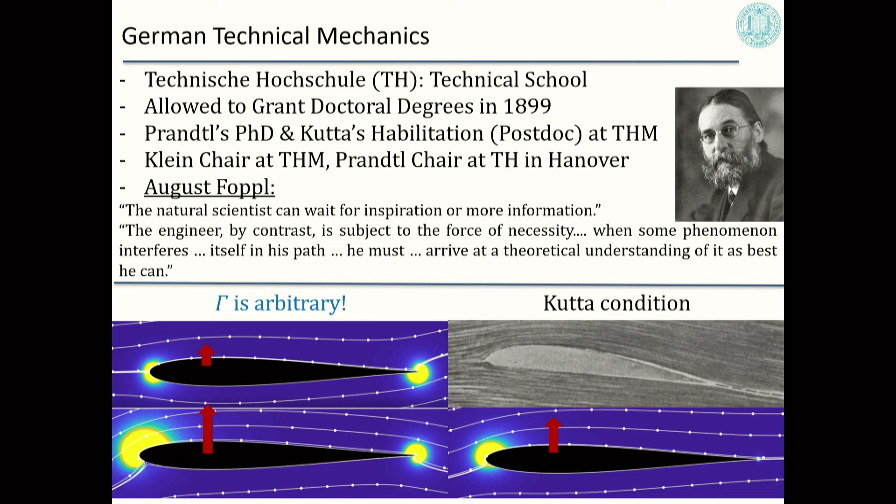What if I have a different shape that doesn't have a sharp edge? Or even with a shape with a sharp edge, fine, but in reality this sharp edge is not mathematically sharp. So why are you considering it as mathematically sharp? That was the criticism from the British school.

And really you can see now the difference. One school is trying to get a general theory that works for all shapes, accounting for all factors like viscosity and others. The other school is just focusing on the problem of the time to come up with a good enough theory.

This is well expressed by George Thomson: 'What is perhaps harder for the scientist to realize is the doctrine of good enough - the better is the enemy of the good.' So the solution by the engineers was not less rigorous - it actually satisfies a perfectly legitimate solution of the Euler equation. But it's not general, it serves the purpose. And that's the main difference.

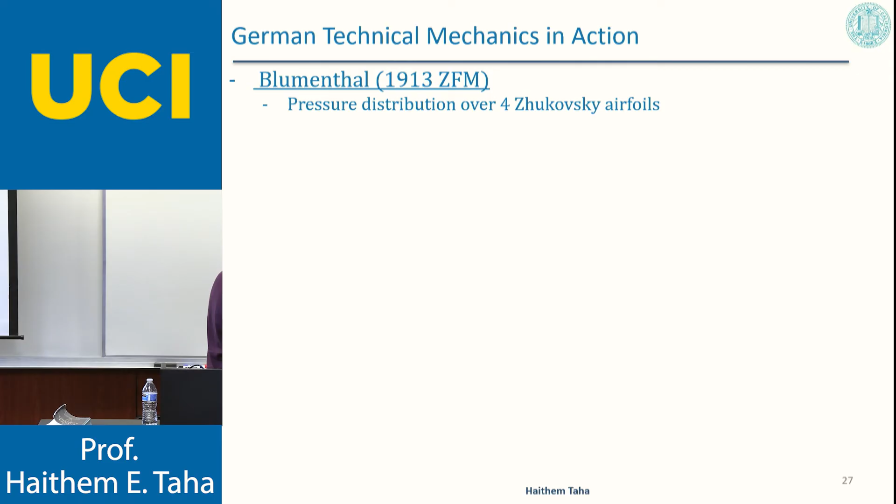I have many other examples, frankly speaking, of the difference between the two, but since I'm running out of time, let me go to the godfather.

Prandtl. So, let me see how I'm doing on time, I don't know. Okay, yeah.

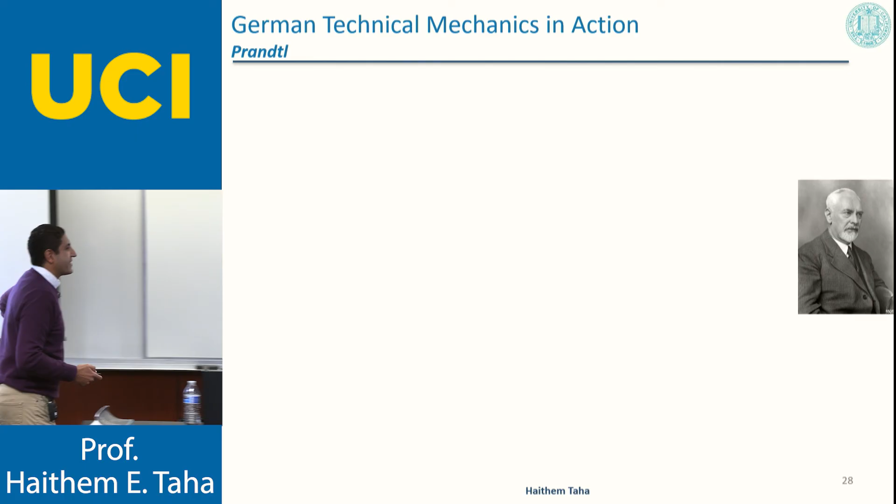So Prandtl, he actually got his PhD in 1900 from TH Munich. Next year he was at TH Hanover. In 1904 he made the historic paper of the boundary layer.

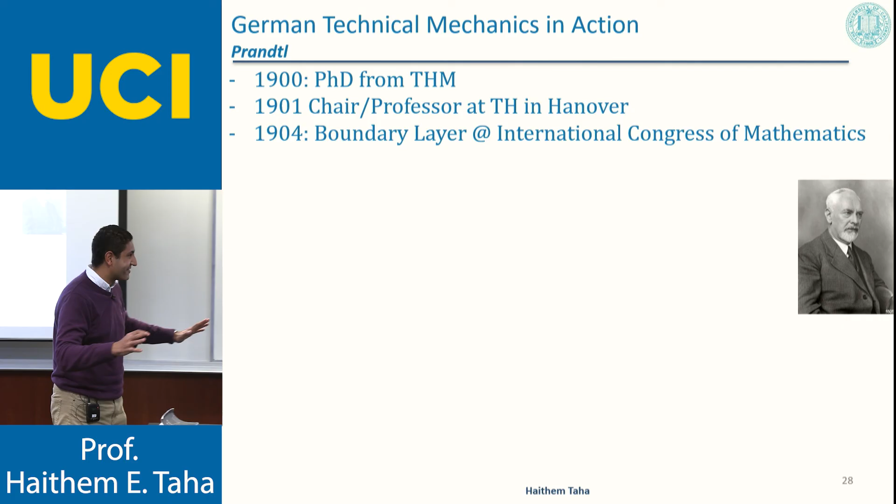So to see how effective that is, Goldstein in his Annual Review of Fluid Mechanics paper describes it as one of the most important contributions to science made during the 20th century. Lighthill said boundary layer is to fluid mechanics as special relativity is to physics.

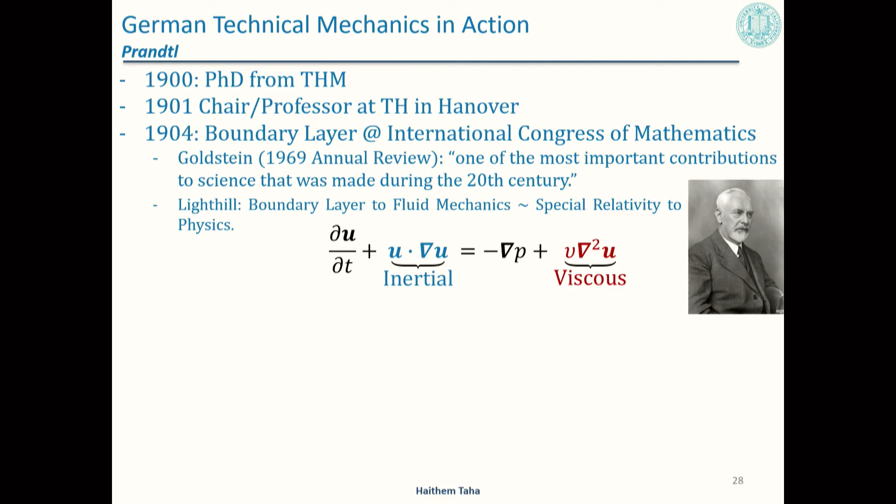Why is it so important? Because it's perhaps the first time that allowed us to account for these two competing terms in a systematic way. Before that, we were used to accounting for one term but not the other. Like in ideal fluid, we account for inertial terms but not viscous terms. In the classical solutions we teach in 230B, viscous flow, most if not all of them account for the viscous terms, like laminar flow in a pipe, or the Stokes oscillating problem, the second problem. In all these, we account for the viscous term but not the inertial term. So this is perhaps the first time we can account for the two in a systematic way, not just for a particular case, but for most cases.

And how could he do that? Because of his engineering ingenuity. Here is the brilliant assumption that has two characteristics: one, it's reasonably accurate; second, it's quite enabling. Because once you adopt this assumption into the equation, you arrive at a new set which are more tractable, and you can even obtain analytical solutions.

He used this formulation to estimate friction and boundary layer thickness, and even did boundary layer control, sucking the boundary layer inside the body, controlling separation. So as early as 1904, where people were even stumbling upon getting an ideal flow solution, not knowing what the closure condition should be, whether the Kutta condition or not, Prandtl was doing a thorough and serious analysis with viscous flow, getting friction, boundary layer thickness, and even doing boundary layer control.

Of course, Felix Klein was among the audience. He was intrigued by Prandtl's presentation, so he decided to attract him immediately to Gottingen. And in his nomination, he wrote that Prandtl combines the expert knowledge of the engineer with the mastery of the apparatus of mathematics and has a strong power of intuition combined with a great originality of thought.

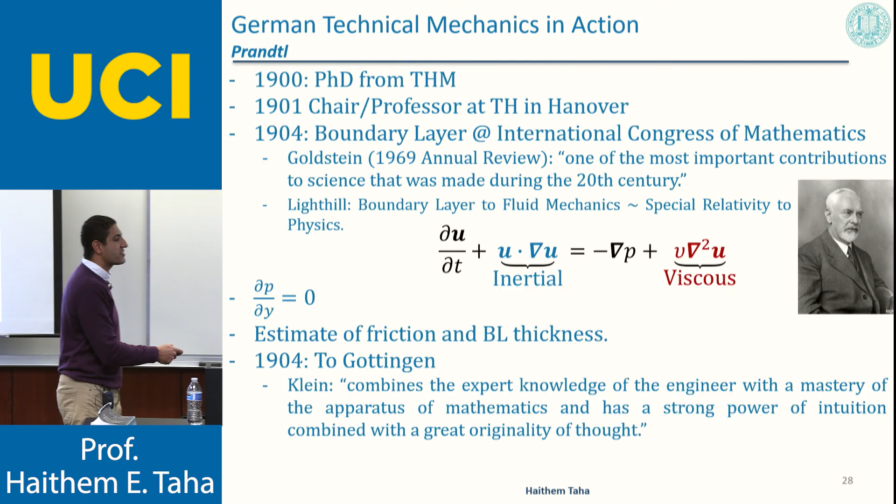Interestingly, Prandtl put forth the physical concept of the boundary layer in 1904, and until today, more than 100 years later, it's still an open problem in mathematics. Mathematicians are still trying their very best to prove that the Navier-Stokes solution converges to the solution of the Prandtl boundary layer equation inside and the ideal flow outside. It's not proved mathematically yet.

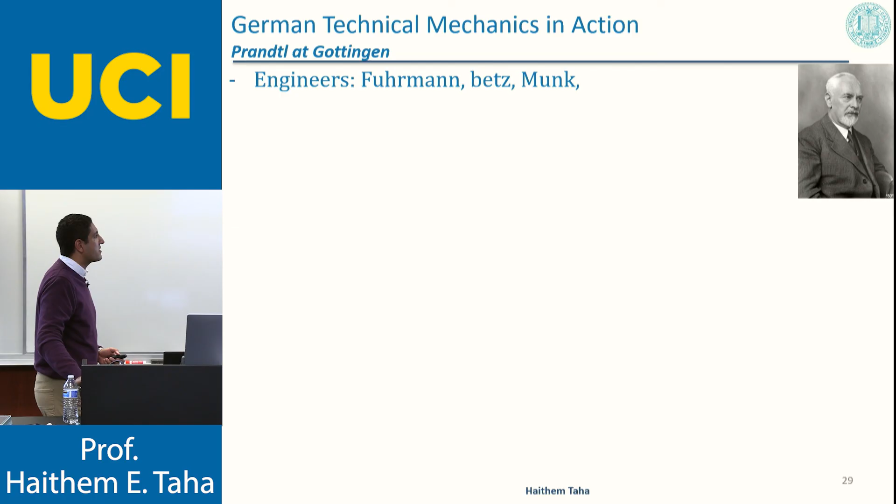At Gottingen, he worked with engineers Fuhrmann, Betz, and Munk, where he developed his other big theory, the Prandtl lifting line theory. He adopted Lanchester's picture of the horseshoe vortex system, two trailing vortices connected to the bound vortex on the wing, in a way that satisfies Helmholtz's laws of vortex dynamics.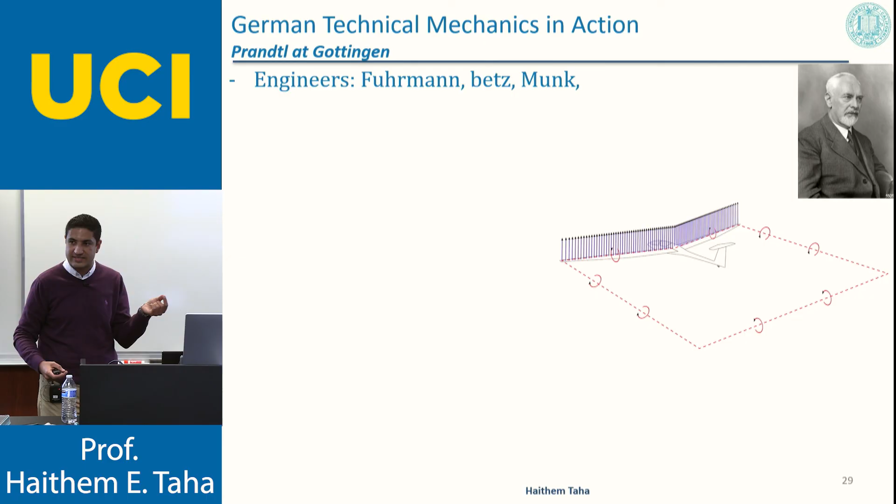His contribution was in the quantitative analysis, in the sense that he made the analogy between an electric current in a wire and a vortex line. Similar to how an electric current in a wire induces a magnetic field in the surrounding, a vortex line induces a velocity field in the surrounding, and both are governed by the Biot-Savart law. So he used the Biot-Savart law to obtain the induced velocity on the wing due to these two trailing vortices, so he can get how much lift is decreased and how much drag is increased.

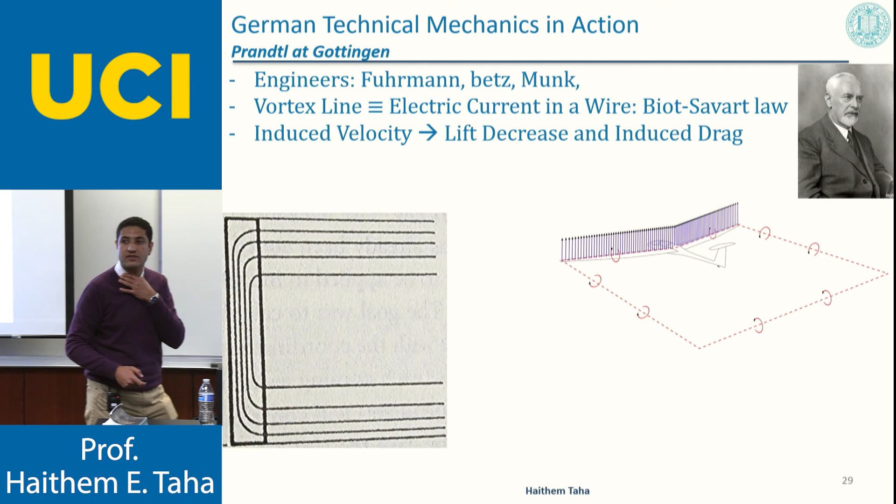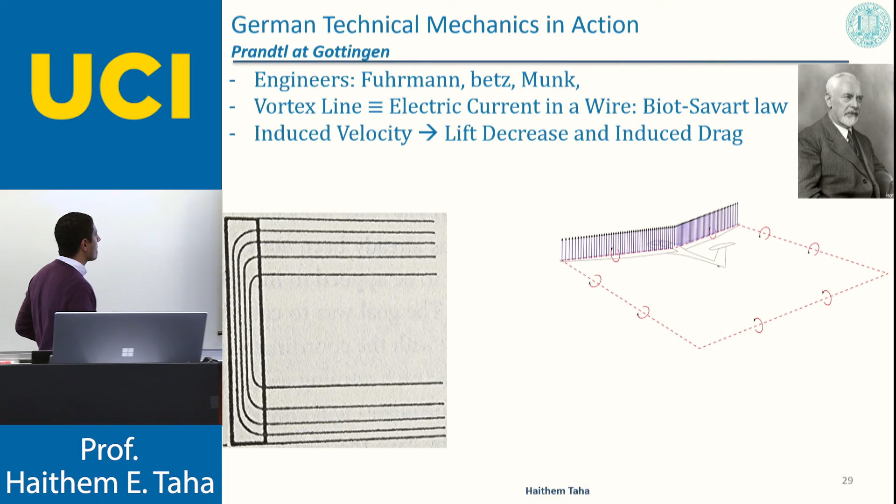He also refined the picture by Lanchester. Instead of having one horseshoe vortex, he had infinitely many of these, to have a continuous variation of circulation over the span and remove the singularity at the tip. And from this, he managed to obtain his famous two conversion formulas.

By the way, Prandtl's theory is not complete on its own; it cannot give you lift and induced drag by itself. It needs to be used in conjunction with the 2D theory. Actually, better than that: if you give me the lift and drag measurements of one wing, I can give you the lift and drag data for all other wings of the same profile but different aspect ratios. In this regard, the theory is pretty damn accurate, and it saved tons of wind tunnel testing during the wartime.

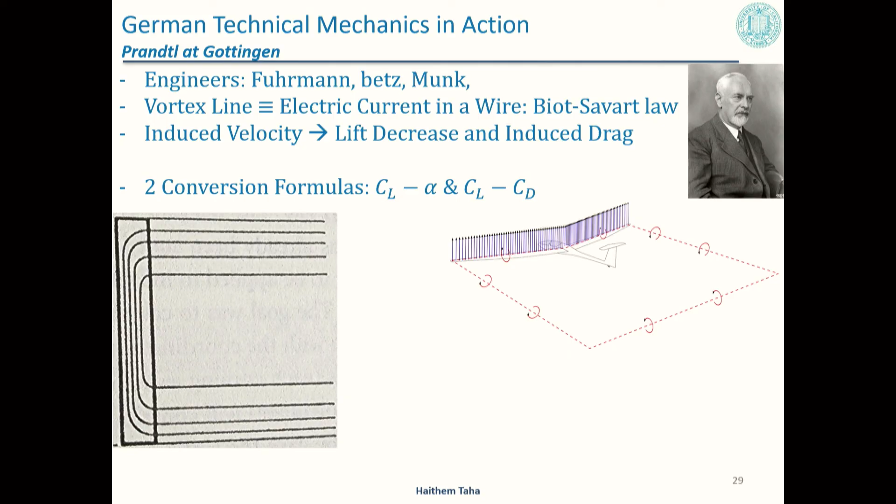I'm done with, obviously, this engineering ingenuity, and we'll go to the physicists. How about what the physicists were doing? Germany at the time, they had the GOAT, right? So how come they were not using him during the war?

And indeed they did. Actually, he worked as a consultant for two airplane companies during the wartime. And if you want to learn about the efforts of the greatest physicist of all time for aerodynamics, you need to come to tomorrow's lecture.